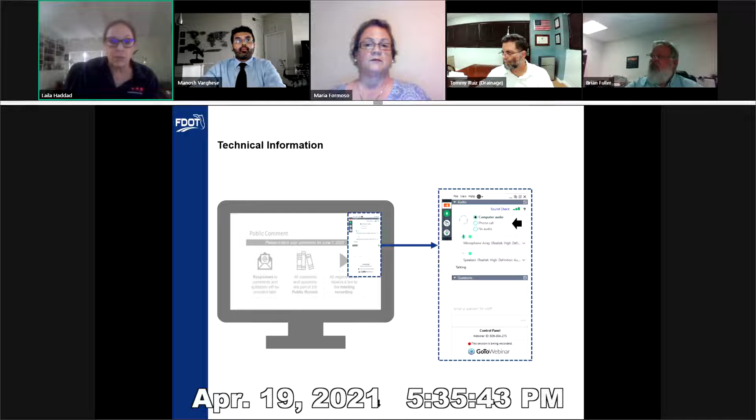Next slide, number 5. For those of you who have dialed into the meeting on the telephone line and are viewing a hard copy of the slide presentation, the presenter will announce the page numbers of the slide being shown on the screen.

Next slide, number 6. All attendees are placed in listen mode only throughout the meeting. You can submit comments or questions by typing them into the question pane on the control panel anytime during the presentation. We will provide responses after the presentation, or you can wait until the end of the Q&A session and we'll open up the microphones.

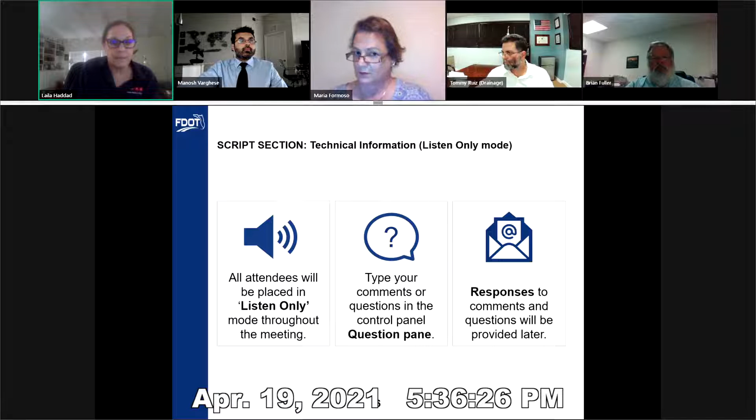Next slide, number 7. This workshop is being recorded, this meeting, and will be available after the meeting on the project website.

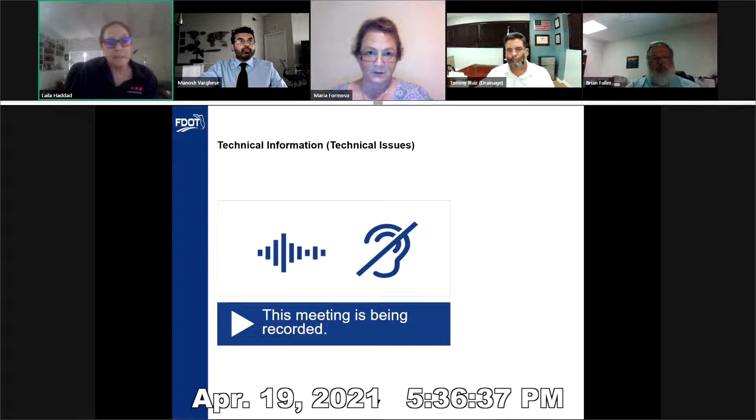Slide number 8, please. Public notice for this virtual public meeting, including information on how to access the meeting platform, was provided in flyers to property owners and tenants in the project area, a posting in the Florida Administrative Register, advertised in the Indian River TC Palm, in emails to persons on the project contact list, on social media feeds, and other notification methods. The notice was also posted on the City of Sebastian and the Indian River County MPO website.

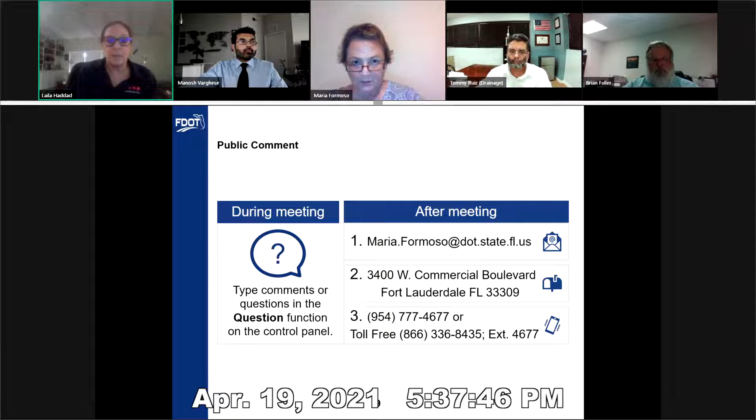Next slide, number 9, please. The department encourages the public to participate in this project by submitting comments and questions. As mentioned earlier, you can type your comments in the question function on the meeting control panel during today's meeting. You can also email the FDOT project manager or send mail to 3400 West Commercial Boulevard in Fort Lauderdale, or you can call the project manager at 954-777-4677. All comments and questions submitted through these options are part of the public record for this virtual meeting and will be considered by the department during project decision making.

Slide number 10. Non-discrimination policy and rules of engagement. Next slide, number 11, please.

The Florida Department of Transportation is required to comply with various non-discrimination laws and regulations, including Title VI of the Civil Rights Act of 1964. Public participation is solicited without regard to race, color, national origin, age, sex, religion, disability, or family status. Persons wishing to express concern about Title VI may do so by contacting either the Department of Transportation District 4 coordinator or the Title VI coordinator in Tallahassee.

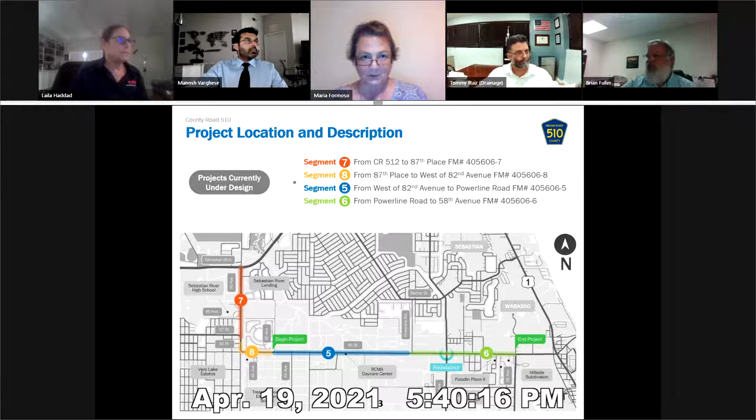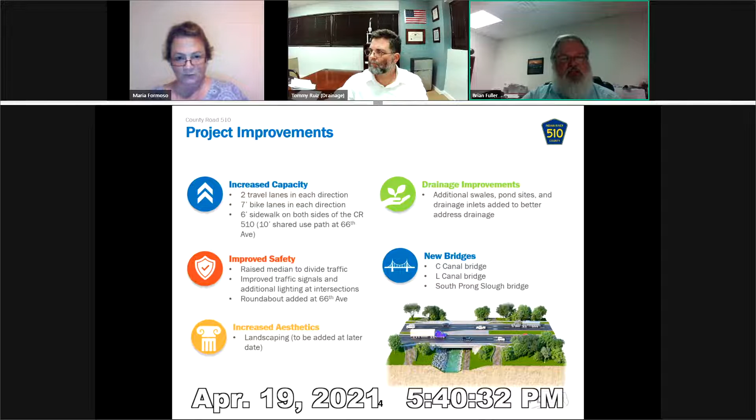Slide 14, project improvements. This project includes increased capacity, adding 2 travel lanes in each direction, and providing 7-foot bike lanes in each direction. We're also providing 6-foot sidewalks on both sides of County Road 510, with a 10-foot shared path at 66th Avenue. Improved safety includes raised medians to divide traffic, improving traffic signals, additional lighting at intersections, and a proposed roundabout at the 66th Avenue intersection. Increased aesthetics, with landscaping added at a later time. Drainage improvements include additional swales, pond sites, and drainage inlets to better address drainage requirements. 3 new bridges are included: one at C Canal, one at L Canal, and one at South Prong Slough.

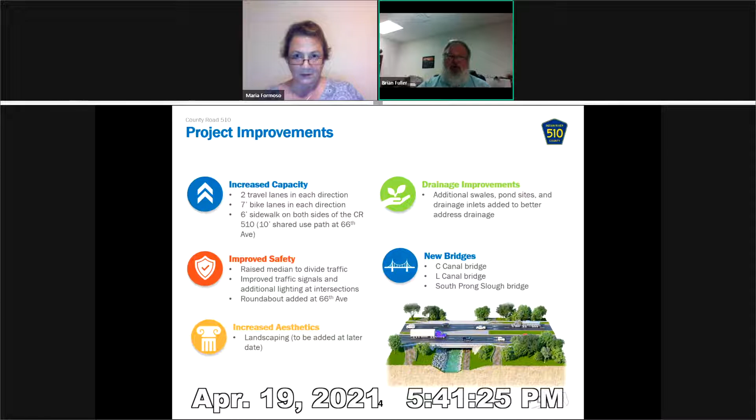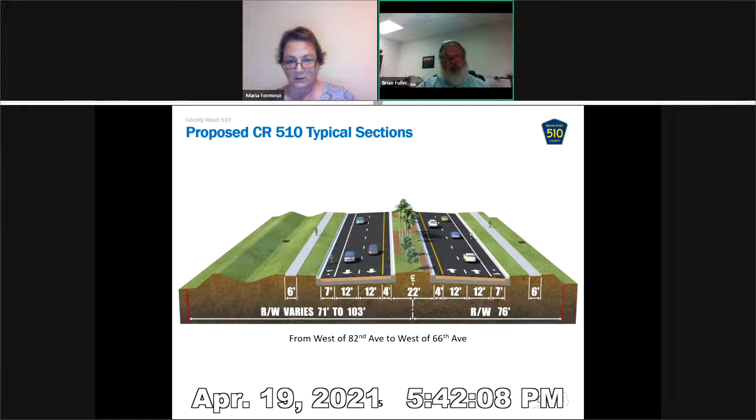Slide 16. This is the proposed typical from east of 66th to 58th Avenue. It includes 2 11-foot lanes, a 7-foot buffered bike lane, a 6-foot sidewalk on both sides of the roadway, and a 22-foot raised median. Roadway drainage is collected in curb inlets within the curb and gutter section and piped to the proposed pond site.

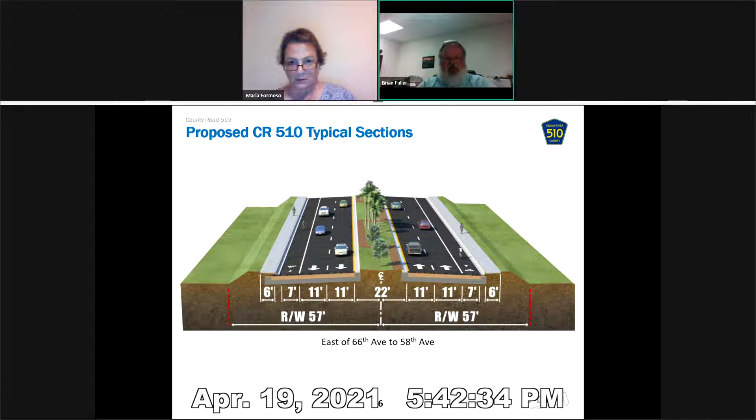Slide 17. As part of this project, right-of-way acquisition will occur on both the north and south of the existing County Road 510 to accommodate the widening of the roadway. Drainage easements will be acquired for proposed water retention areas and off-site ditches. Temporary construction easements and license agreements will be acquired to accommodate construction activities outside of the proposed right-of-way.

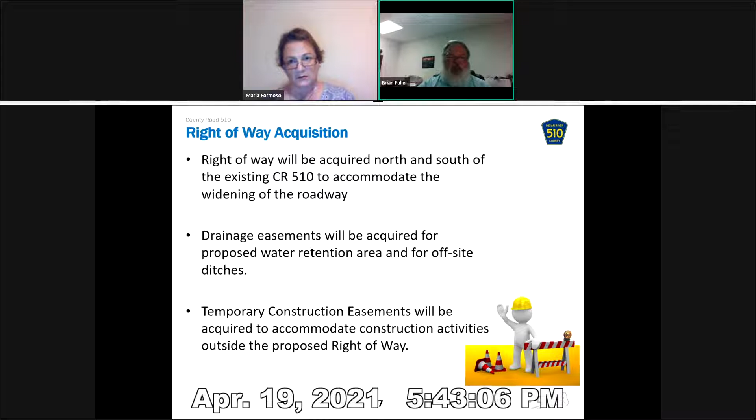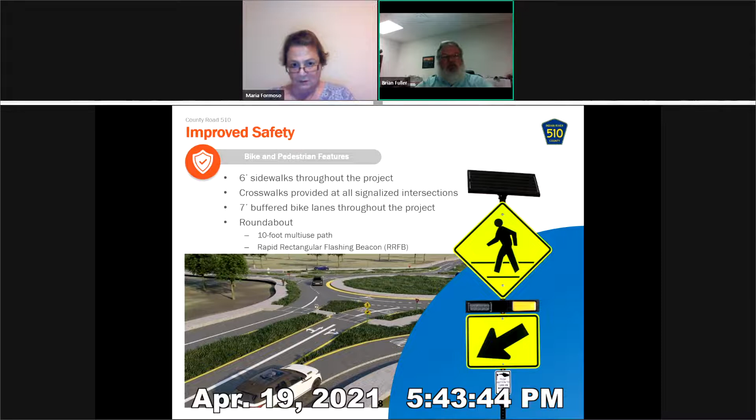Slide 18, proposed improved safety for bike and pedestrian features. We're providing a 6-foot sidewalk on both sides of the road throughout the project limits. Crosswalks will be provided at all signalized intersections, and a 7-foot buffered bike lane will be provided on both sides of the roadway throughout the project. Additionally, at the roundabout proposed at 66th Avenue, we're proposing a 10-foot multi-use path and the use of rapid rectangular flashing beacons for the crosswalk.

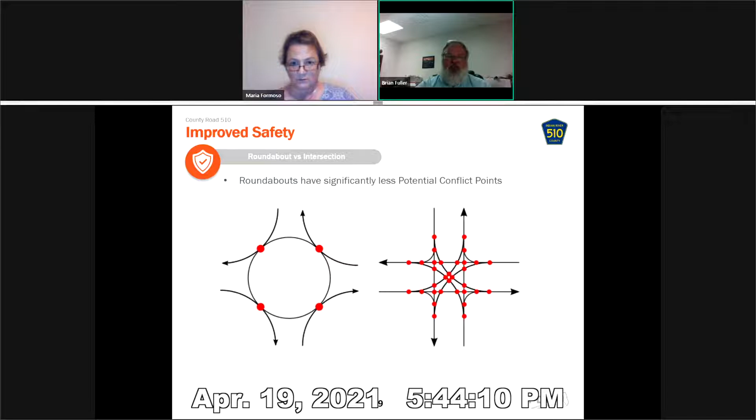Slide 19, improved safety. This is a comparison of the potential conflict points for the proposed roundabout at 66th Avenue. As you can see on the left, there are only 4 conflict points with the proposed roundabout, but with a standard signalized intersection, you have a total of 32 conflict points.

Slide 20, aesthetics. Any landscaping proposed for the project will be added once the roadway construction is complete. With the proposed roundabout, we provide a gateway opportunity, and there is also potential for a monument display.

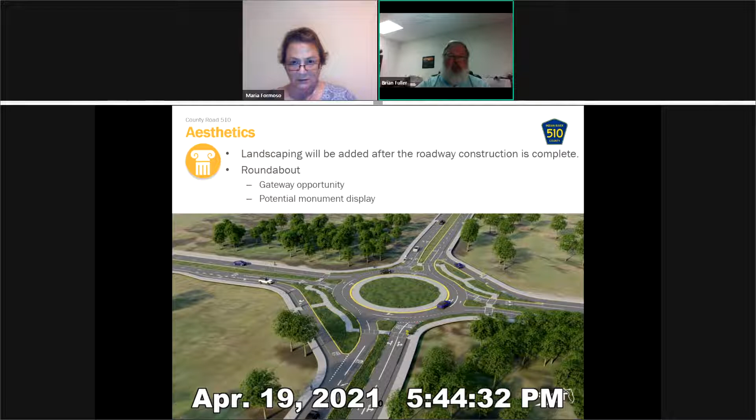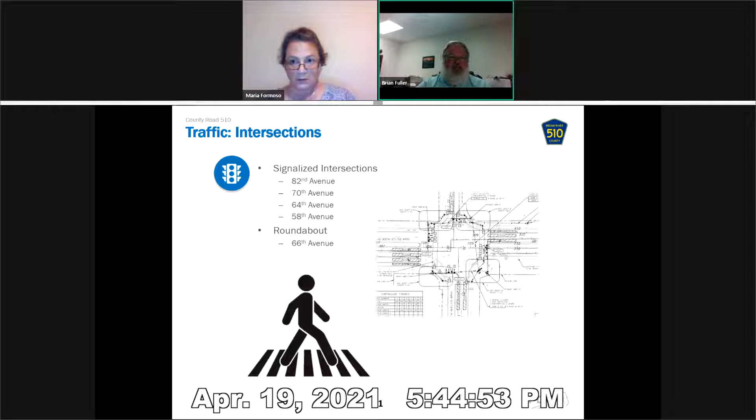Slide 21, traffic intersections. We are proposing signalized intersections at 82nd Avenue, 70th Avenue, 64th Avenue, and 58th Avenue. Additionally, we are proposing a roundabout at the 66th Avenue intersection.

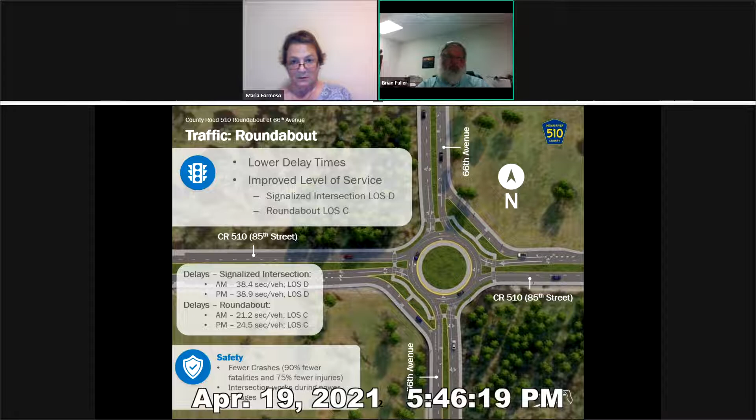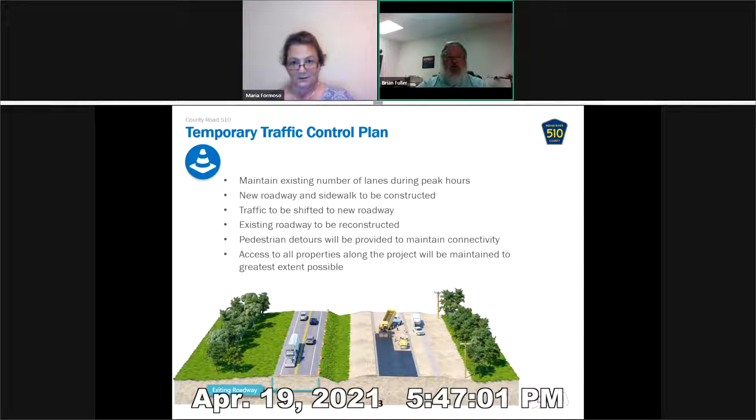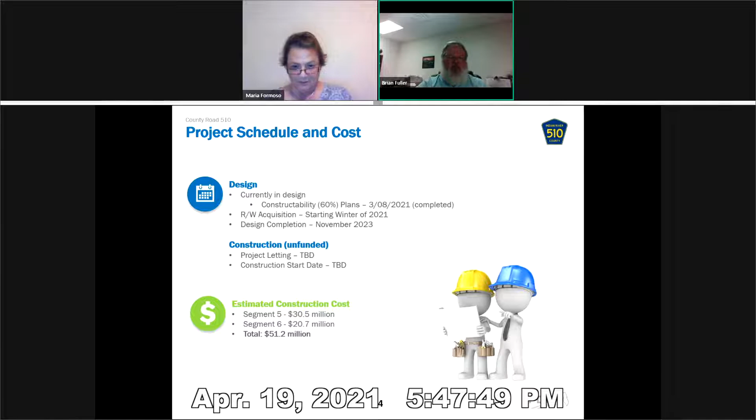The current cost estimate for segment 5 is $30.5 million, and for segment 6 is $20.7 million, for a total cost of $51.2 million.

And now we'll have a question and answers. Layla? Oh, I'm sorry. Maria, Layla, are you muted? Sorry, I was muted. I know how that goes.

Brian? Yes, as part of this design, the project was simulated with two trucks going through the intersection at the same time. Manosh, would you go ahead and provide that so they can see it? It may be a little bit hard to visualize, but it shows the trail of two semi-trucks going through the roundabout at the same time. Yes, give me one second, let me just share.

There's another question. What is the closest comparable roundabout to this one? There's a couple of roundabouts. There's a new one that was just completed.

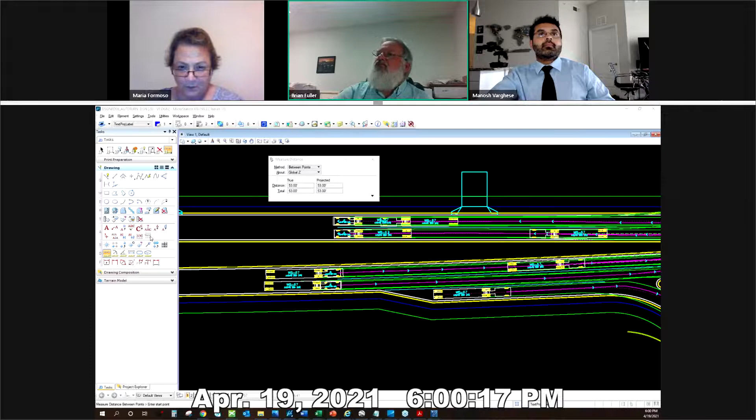In Brevard County, at Lake Andrew and Pineda, it is a 2-lane roundabout. It's just been opened. But I'll go ahead and finish this one, then we'll go back to the other one, Manosh. Additionally, in Palm Beach County, there's several 2-lane roundabouts, along Donald Ross Road, and also on Central Boulevard, which has multiple roundabouts. Now, some of these have a bigger circle just because of the geometry, but they are still 2-lane roundabouts.

And also at PGA at Marisol.

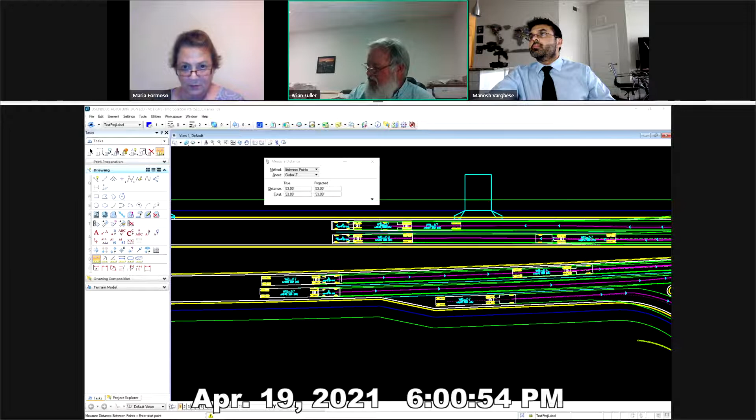Now, going back, as you can see, this is two semi-trucks approaching the roundabout. Scroll to your right, and let's see them traveling through the roundabout.

With a semi-truck, there is the concrete apron in the roundabout, which is allowed for semi-trucks to drive over. That's why it's designed that way, so they can utilize it.

Zoom out and center on the roundabout. As you can see, the two trucks are able to continue around through it. This is a requirement from DOT, that it has to accommodate commercial vehicles, and actually it's required to accommodate a commercial vehicle with a personal vehicle at the same time. This one actually goes above and beyond that by being able to accommodate two WB-67 vehicles at the same time.

What is the anticipated completion of the entire project? We currently do not have 3 out of the 4 segments funded for construction.

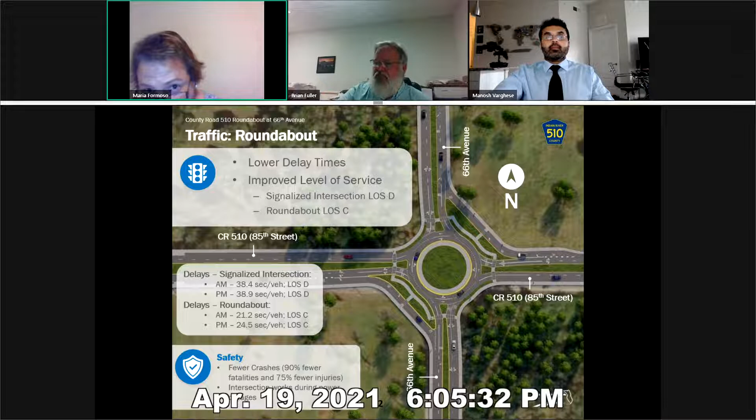Robin Brisbois, are you attending the meeting? Yes, I'm here, Maria. So Robin Brisbois is going to be overseeing the right-of-way appraisal and acquisition efforts, so I will turn it over to her to answer that question.

I think what they're saying is that the right-of-way cost estimate is based on 2015 figures. Is that what you're saying, Layla? Yes, I believe that's the question. I would have to look into that to verify if that is accurate or not. I don't know right now.

Can we get the email and the name of the person so we could follow up, please? I'm taking a note of that.

I know that we update our cost estimates yearly, so that doesn't seem correct, but I need to look into it. We can follow up on that one.

How do you handle the construction of the roundabout? Will the intersection be closed? No, the intersection will not be closed. Traffic will need to be shifted to accommodate construction of the roundabout, but we will be maintaining 2 lanes on 510 during construction.

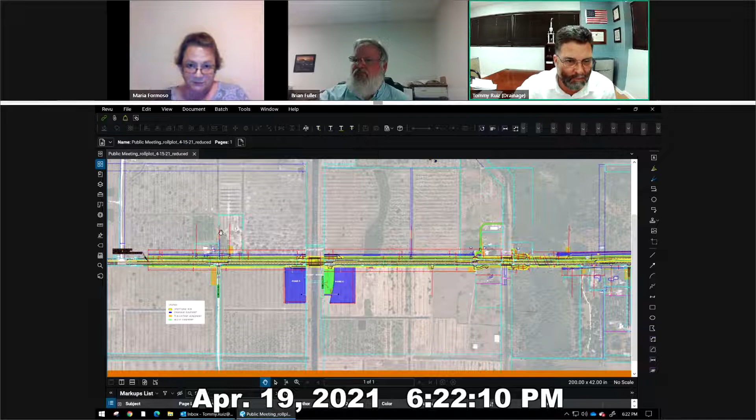Yes. Okay, I want to share my screen. I think you need to make me a presenter so I can go through. Okay, Tommy, I made you a presenter. Great, thank you. Are you able to see my screen there, showing Pond 5 at the very beginning? Yes, we are. Okay, great. I'll start all the way at the west and move my way east. Starting over here, here's 84th Avenue.

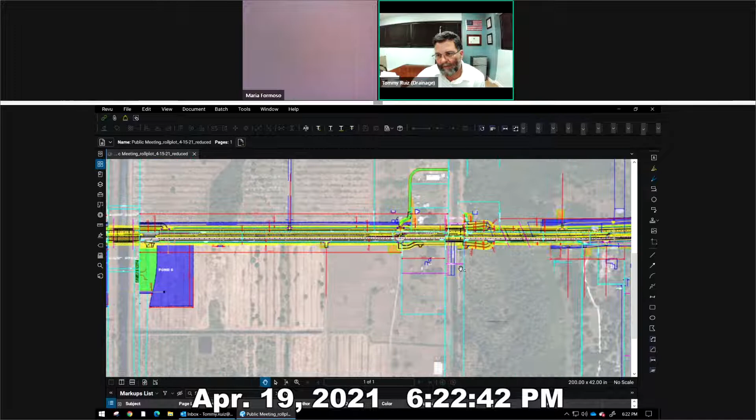As we come through, we're going to require one pond here from private property. There's going to be another pond required here, Pond 6. This is Lateral C canal. Moving east, we keep going. We're going to need a pond right here. This pond right here, Pond 7, is on property already owned by Indian River County, so no right-of-way acquisition there. Moving on.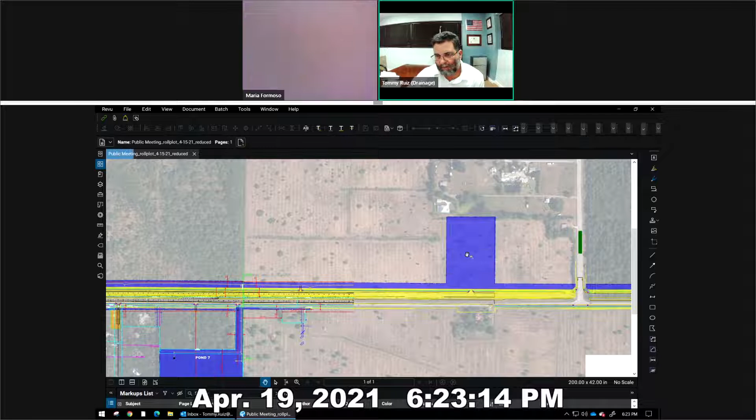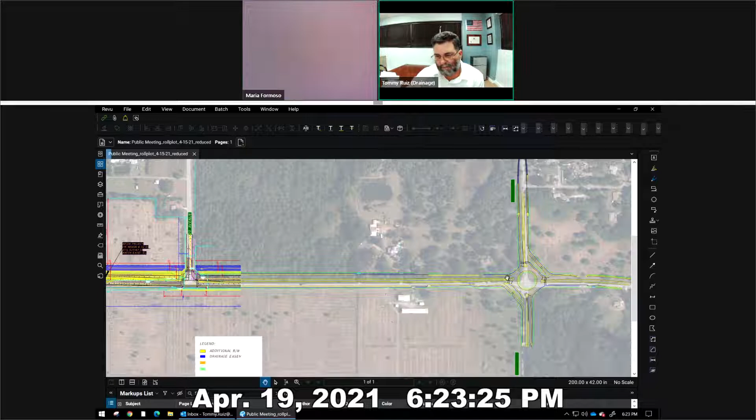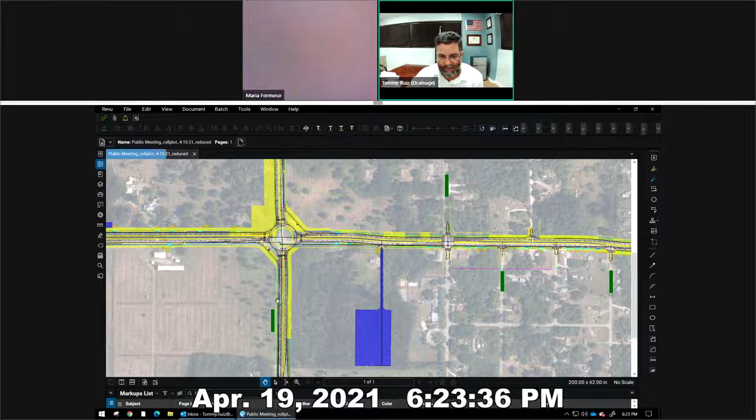We're going to need one pond right up here, Pond 8. And Pond 9, right here. This is the 66th roundabout. So Pond 9 is right here.

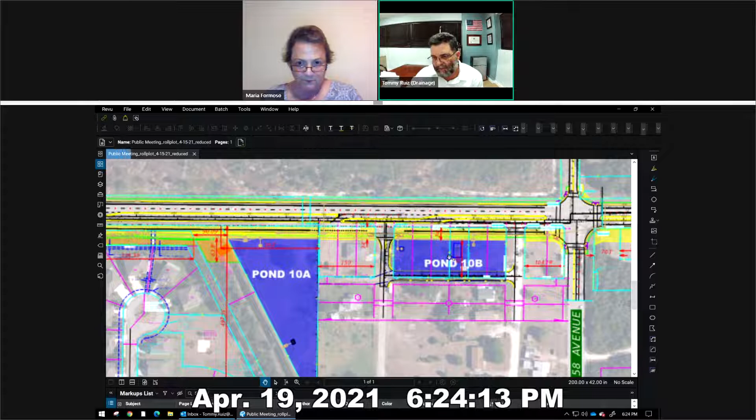And then finally, Pond 10 is actually a two-part pond. We've got Pond A and B, all here near the end of the project. Pond 10A is on property owned by Indian River County. And Pond 10B, most of this is owned already by Indian River County, except for this little parcel right here where there's a house located. So all these other parcels are already owned by Indian River County. And right now, the right-of-way acquisition being proposed is a drainage easement, and that's it for drainage.

I just got a message from Jim Mann from the Indian River County MPO. Regarding the discussion we had earlier about 66th Avenue, he states that south of 510 is going to be widened to 4 lanes, but not north of 510. That, I believe, was what we thought was an Indian River project, but evidently it's not. Okay.

Yeah, so the Indian River project is, I had north and south. The project with Indian River County is the south. I am at 7,800 across from 79th Terrace. The original plan already has the retaining wall from the front wall of my house. Should I add the additional width of the bike path, 7 feet, and walking path, 6 feet, as additional loss of land? This would put the wall a minimum of 30 feet from the front of my house, possibly even closer. Is this correct?

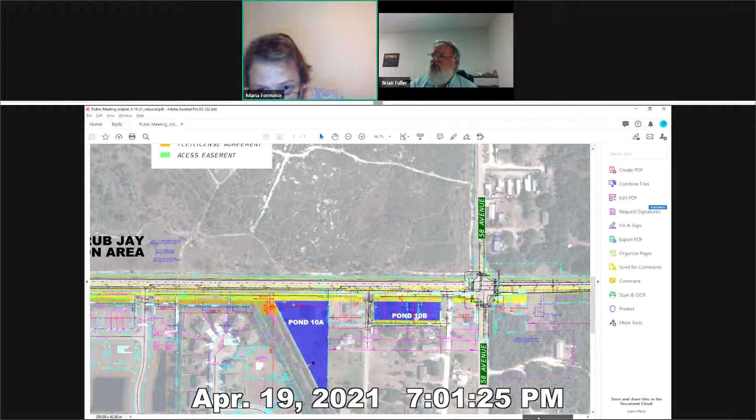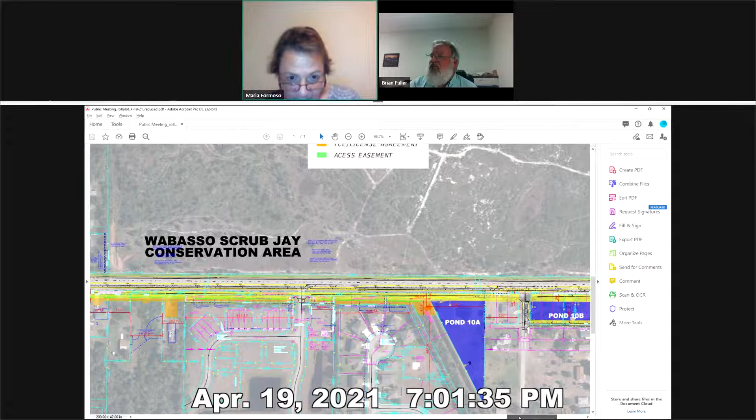I'm east of there, yes sir. We're panning through, we're zooming in, and then you tell us which direction to go. To 58th Avenue, I see that. Now we're going west. Okay, now we're going west.

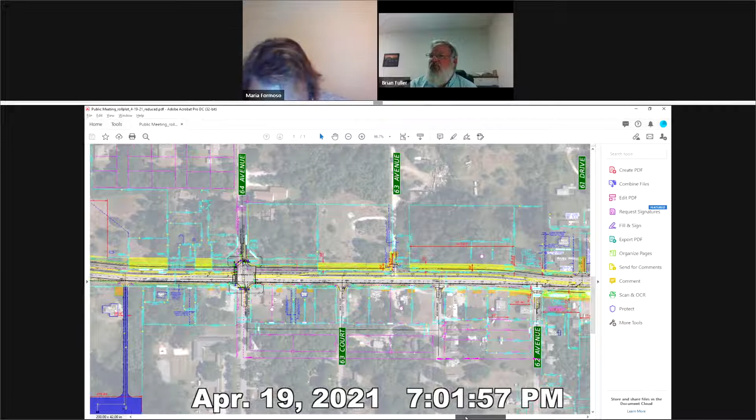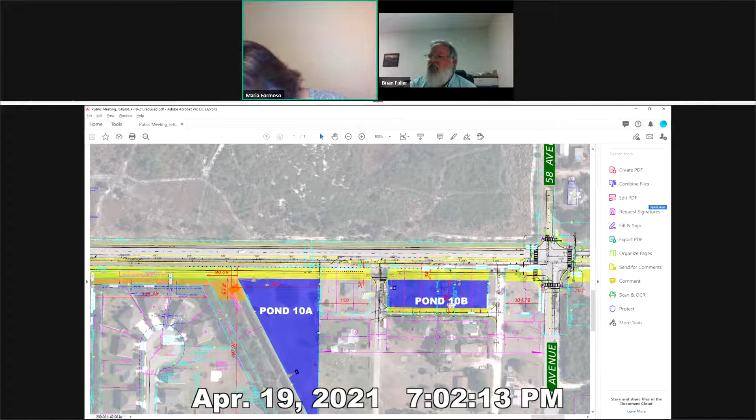58th Court, do you show that on there? No, you have to go 58th east. Court was, I didn't think you would have it on there. About 59th Avenue? Please bear with us, sir. 58th Court, keep going east, Manoj. Which one? This is 58th Court. Hold, the road right here.

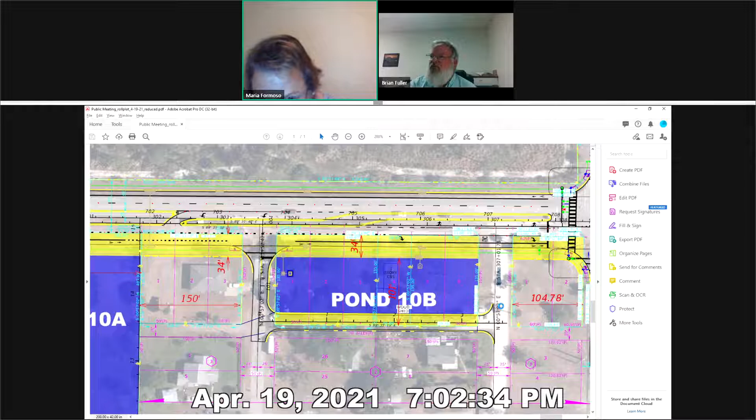This is 58th Court. Yes, so if I may, sir, actually quite a bit of thought was given to this. Currently you have access to County Road 510 from 58th Court. In the future, 58th Court? No ma'am, there's a dead end, and the reason I know that, my aunt owned the property at the end of 58th Court, and that's her private property. There is no throughway there.

Manoj, can you zoom in to the intersection of 58th Court and County Road 510, please? Yeah, sorry, give me a second. The PDF seems to be loading. One second. Let me just close it and reopen it. Give me one second.

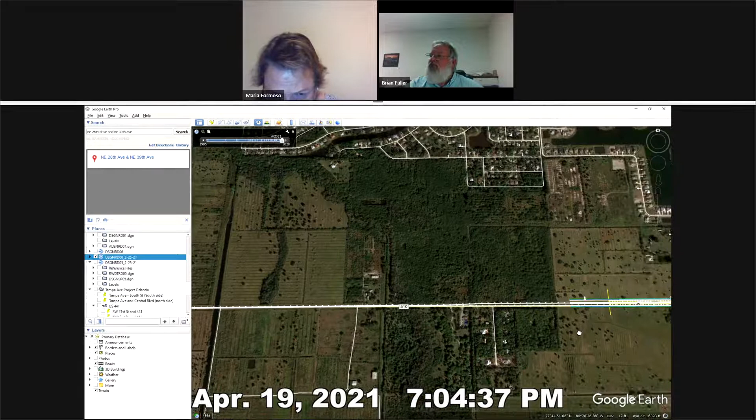You wanna find it? Sorry, this file is quite large. Let me, I think maybe the easiest way... okay, here it goes. Maybe an easier way would be to load it differently, because this is going very slow. There's a road here, part of Palatine Square. Right, yeah, I found where they were gonna build a pond right here, I think they were gonna connect the two together. Well, that would come behind two of the citizens' houses that they're buying, but there's no access road to the south of there.

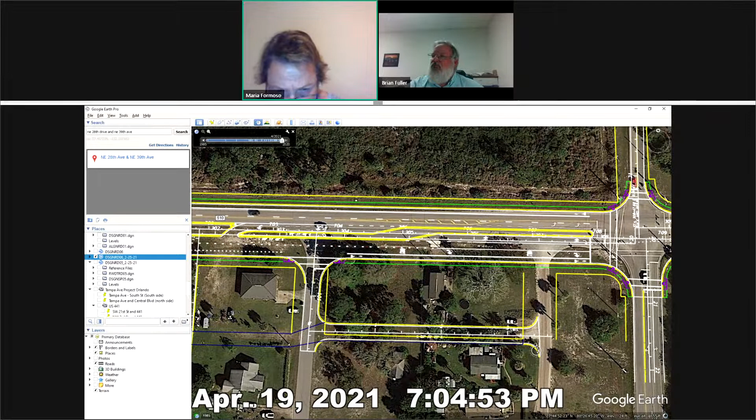Manoj, I have the roll plot up if you want me to share that. Oh, you got it there. Okay, I'm doing it with Google Earth. I think this will be... can you, Manoj, zoom in on 58th Court? Yes, that's this road. So, the gentleman that made the comment, zoom in there, okay.

If you'll bear with me, I'd like to explain something to you. Currently you have access from 58th Court directly onto County Road 510, do you not? Off 58th Court? Yes, sir. Coming north off of there, yes, but south... Yes, sir, one at a time.

So we studied the option of leaving that access point. And due to your concerns over your safety, we determined that the natural outcome would be people making a right turn out, crossing two lanes to get on the left lane, and make a U-turn to go eastbound. Would you agree with that?

I know about that, this is what you're proposing, but right now those two houses that are on that corner happen to be my cousin's, sir, and they've sold, they're selling it to the state. As of right now, there's no access to that area.

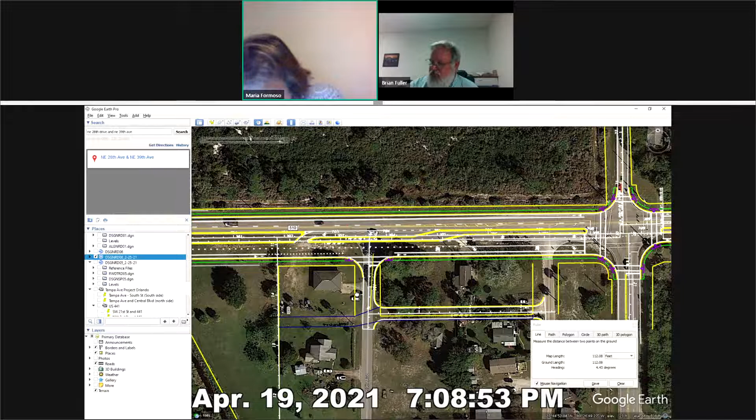So this was done by design, and it was coordinated with Jethro, and it was coordinated with Indian River County and the entire community there, and everybody was on board on this. Yeah, I was there, so I know.

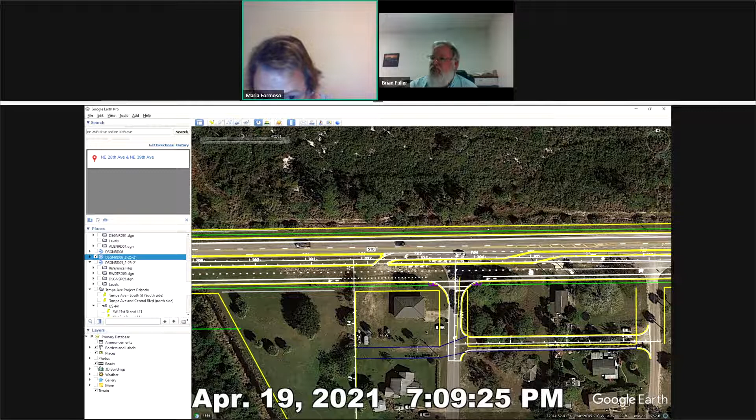But what I'm saying, it's not just there. We're talking about these other roads on the south side of this highway, like 62nd Avenue, 63rd, and 64th. Now, we can only do one at a time. So let's go to 66, and then you can voice your concerns over 66.

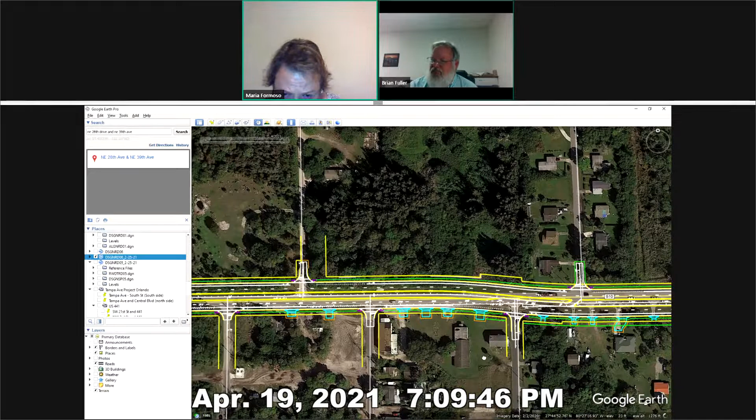So 66 would be at this roundabout. Yes, exactly. So where is your area of concern? Okay, sir, could you tell us what you object to here?

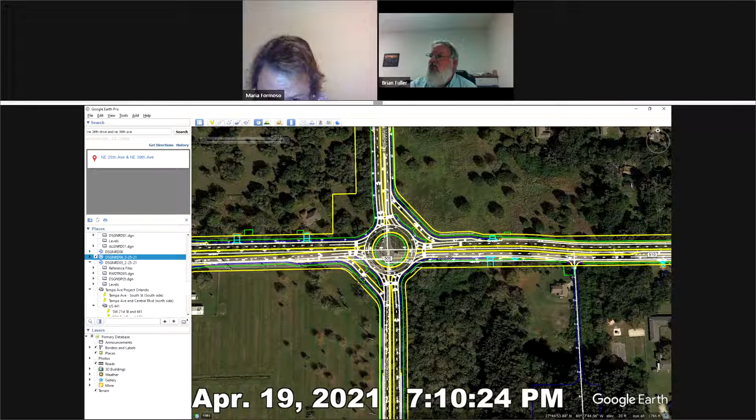Can you show me 61st Drive on your map? Go east, Manoj. East. 61st Drive is here on the top, this north part.

So what was your concern here? Sir, are you with us? I'm with you, I'm waiting on you. Okay, so Manoj says that this is the road you referred to.

That's Lowe's Park, and if you're going north, that's a dead end. The only access they have is coming to 510, and as I said earlier, from US 1 to 7th Avenue, they are locked in. We are providing access off of County Road 510, sir.

And as you can see here, you actually even have a left direct access as well, and an ability to go left going out. We're not changing access for that community, sir. That's what I'm saying. 500 people that live in that area cannot get out to 510 when this traffic is backed up, but you're not showing it on your maps or any of that.

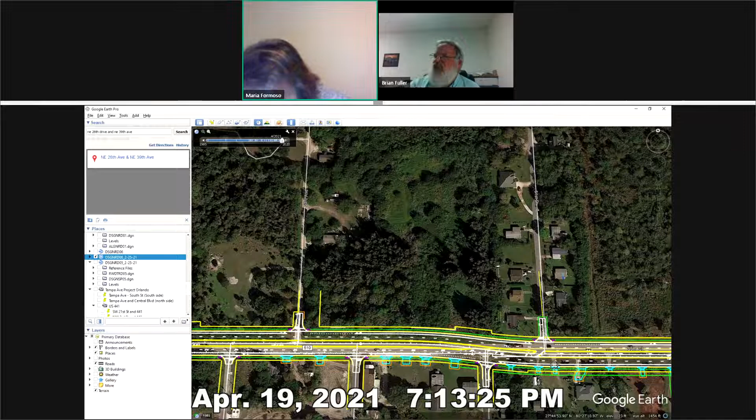And also now, at 64th Avenue, you were talking about a traffic light. At one time, we were told they would not put a traffic light. How are the kids and older folk gonna make it to that store without a traffic light being there? Okay, but we are providing a traffic light, so I'm not sure what the issue is.

Is it that before you requested and were denied a traffic light? I can't speak to that, but we are currently providing a traffic light. There's a caution light there, and we can't get out even there now. Yeah, but it's gonna be a full signal when the roadway is widened. When the road is complete, there will be a full signal there. Yes, sir, okay.

Then it looked like we need to go back to our commissioners to find out, because like I say, I'm still concerned about that egress. If there's a major hurricane and everybody has to come through that area, there's no way in the world that area's people can get out. We can't get out now, and with you widening the highway to 4 lanes, it's going to even be worse.

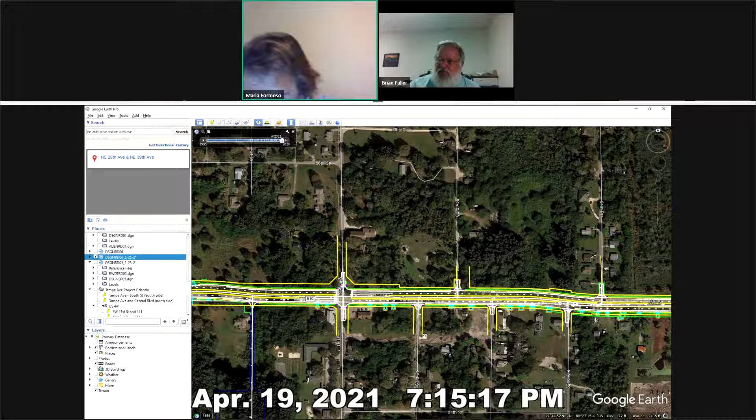I've lived all over the United States, ma'am, and I've seen what these roundabouts do, okay? And they are not in the best interest of anybody. Well, have we answered your questions as far as providing? You have. We have? Okay, thank you very much.

If you would like to meet separately, one-on-one or in a small group, like you said, Jethro knows me. I work very closely with the Wabasso community, they all know me. And if you would like for us to present to you and explain things on a smaller scale, we'd be happy to.

However, keep in mind that the scope of this project is to increase capacity for County Road 510. We're going from 2 lanes to 4 lanes. We're providing access to all the side roads, side streets, and driveway connections, and we have not severed access from anyone. However, the scope of our work does not entail improving the entire community's roads.

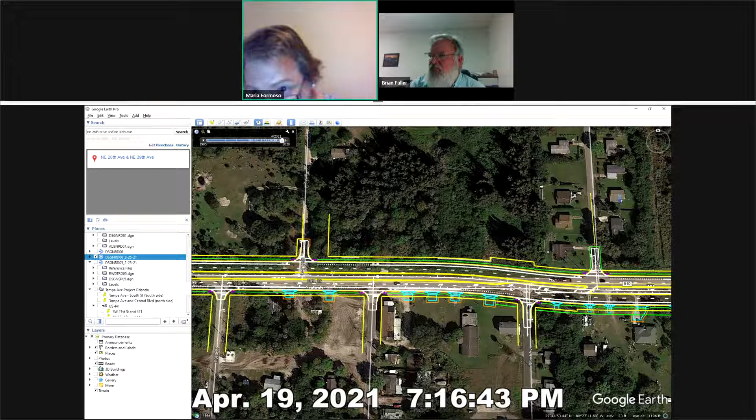First of all, they're not under our jurisdiction. Please let me finish, sir. So if you're looking to accomplish that, I recommend you take that up with Indian River County Public Works or the Indian River County Board of County Commissioners. We'll do that. Thank you so much, sir. Thank you.

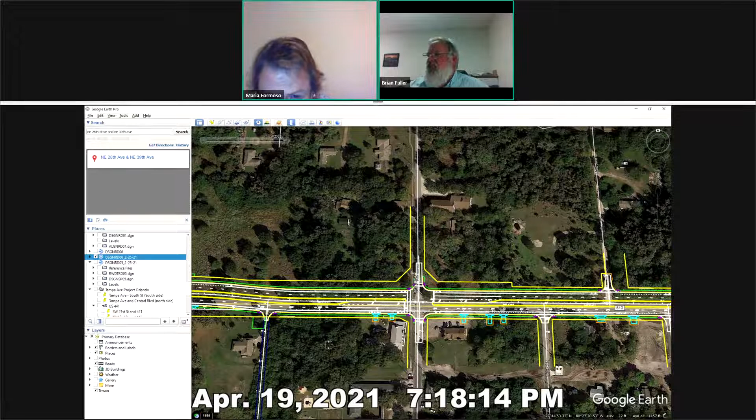Okay, so can we zoom in, and ma'am, if you would please elaborate on what the issues are? How far east will I have to travel out of my driveway to go west?

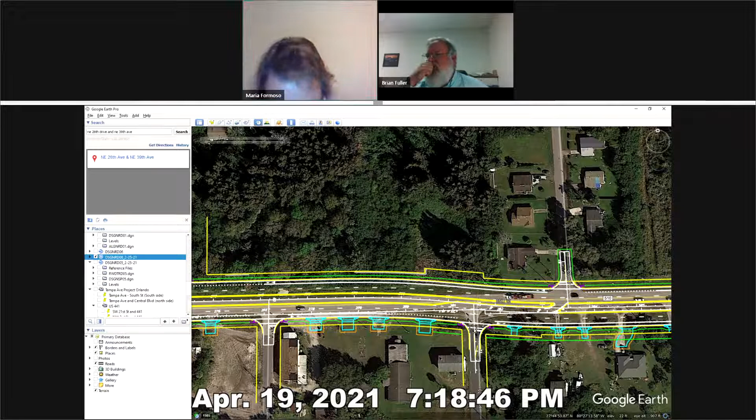First, let's try to find, are you on the south side of the road or north side of the road? Yes, I'm on the south side of the road, which means that will be the eastbound traffic. Yes ma'am, so you would actually access County Road 510 via one of the side streets, and then you'd proceed eastbound, and you'd have to go maybe 400 feet to make a U-turn and then go westbound. Is that about right, Brian? Yes.

Okay, so what the previous speaker was trying to say is that once we access 510, with the traffic being more, it's already a nightmare. It's gonna be worse once you put in the roundabout, and if there is a natural disaster, then we're gonna have a hard time getting onto 510. That's the issue we're talking about.

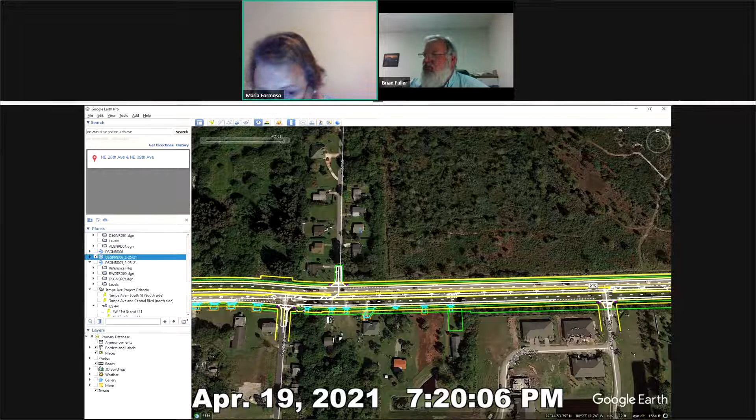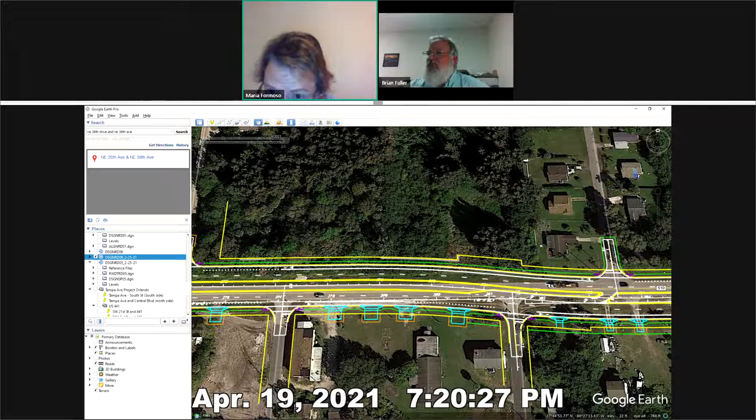Right, I understand, and I appreciate that very much. But what I'm trying to explain is that adding lanes or adding a roundabout doesn't bring in more traffic, you already have the traffic. It alleviates the traffic because it gives it somewhere to go. The traffic you're dealing with now, bumper to bumper, will now have 4 lanes to maneuver through. So it's kind of a misconception, and Brian, jump in and correct me, but I think it's a misconception that if we widen the road or add lanes, we're somehow increasing the traffic. The traffic is going to be what it is now, and the projected traffic will be what it is projected to be.

Brian, do you? Yeah, I mean, that's the reason why we're widening the road, because it needs the additional capacity. You'll still have 2 lanes, you'll actually have 2 lanes in both directions. Right now you only have 1 lane in each direction, so you should have, in theory, double the capacity of what you have currently.

And, emergency situations, you'll have, if you're at 62nd. I'm east of 62nd. So she's probably one of those blue driveway connections, those 4. Is that correct? That's correct. Okay, so say that, I'm in between Summer Lake and 62nd Avenue.

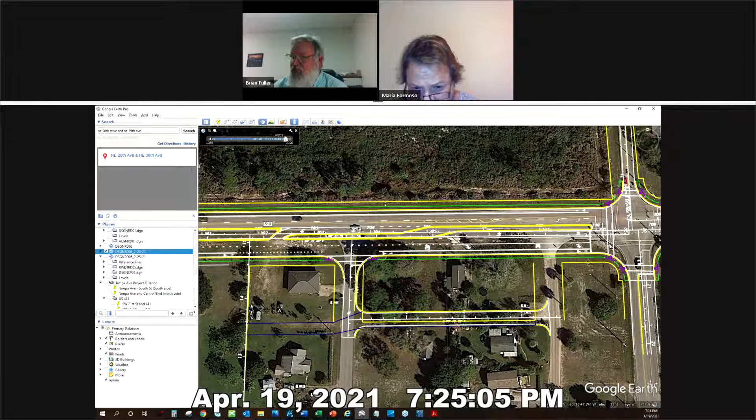No, I'm talking about - you're on 58th Court, and you're going behind Mr. Clark's house, yes, and over to 59th. Okay, would they be able to merge onto 510 off of 59th? Yes, you can - this is 59th right here. You will be able to enter 510 from here.

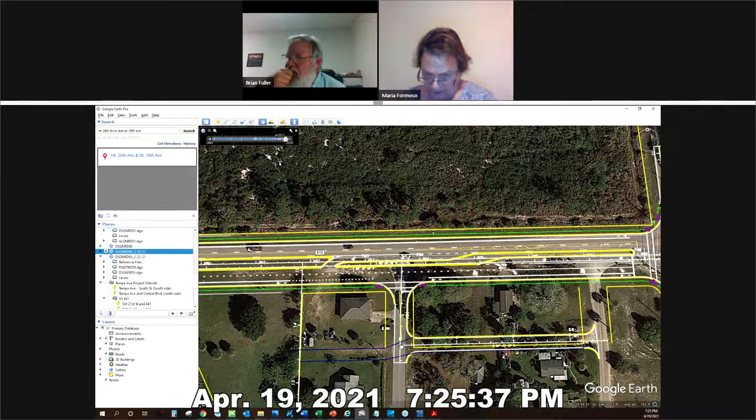Okay, now that second detention pond would look like a triangle. Go back to that retention pond. So what I'm trying to say is, would there not be an alleyway between the Williams and the Rigby's? I see you got a blue line there. There will be - oh, the blue line is a drainage easement. That's not going to be a road.

But the yellow lines you're seeing will be a road connecting 58th Court to 59th Avenue. Okay, so there won't be a road between those two houses. This area here will not be a road, but the area between 59th Avenue and 58th Court will be a road. And thank y'all for putting a traffic light at 64th. Okay, thank you. No problem. Thank you.

That was everybody at City Hall? Or, no, oh, one more, sorry. Got one more.

My name is Doris. The question I have - I had a property on 510 on the top of the hill. I sold the property to the county less than, I think, 7 years ago. At that time when I sold the property, they gave me whatever they wanted for it. I asked them how much they wanted on my property, and they told me they were going to want 40 feet of my property. That's what I thought, but after I sold them the property, I thought they were going to take 40 feet because my property was 150 by 75, and then they took everything, which is what they were paying me for.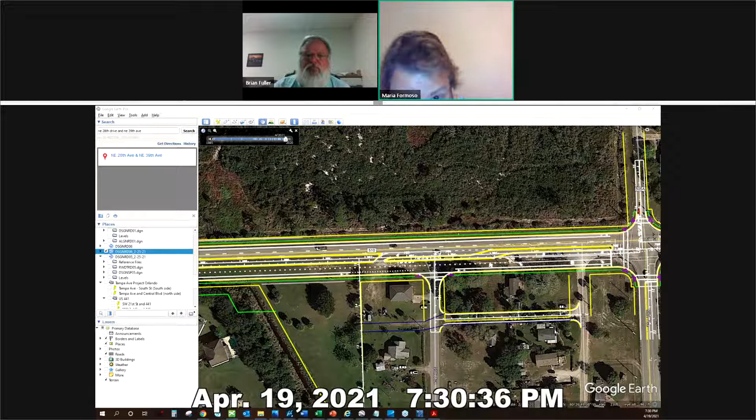I'm not qualified to discuss the price. I'm gonna turn it over to Robin Briswa, and she can perhaps elaborate on how the department deals or would like to deal with situations like yours. You're not the only one. There have been numerous property owners approached by Indian River County before the project became federalized, before the DOT took over the project, and they did not follow the Right-of-Way Uniform Act. This is something we're aware of and looking into. I'll turn it over to Robin so she can correct me if I said anything wrong.

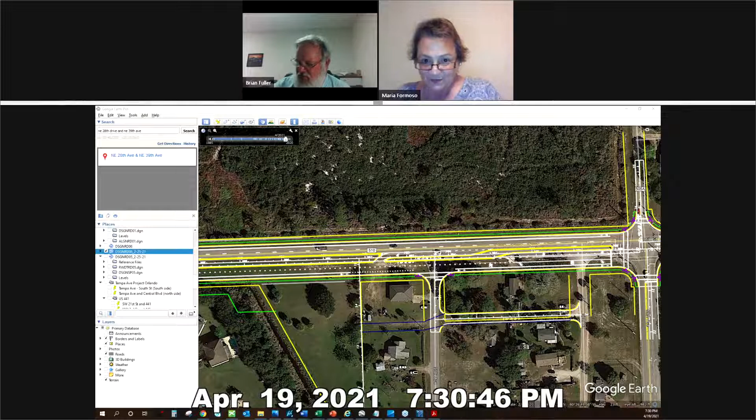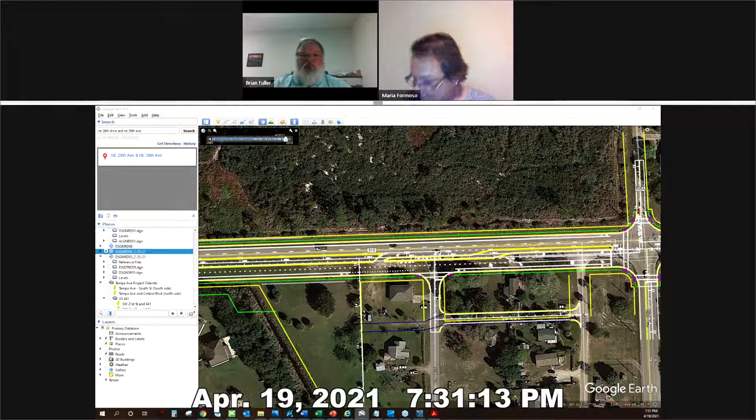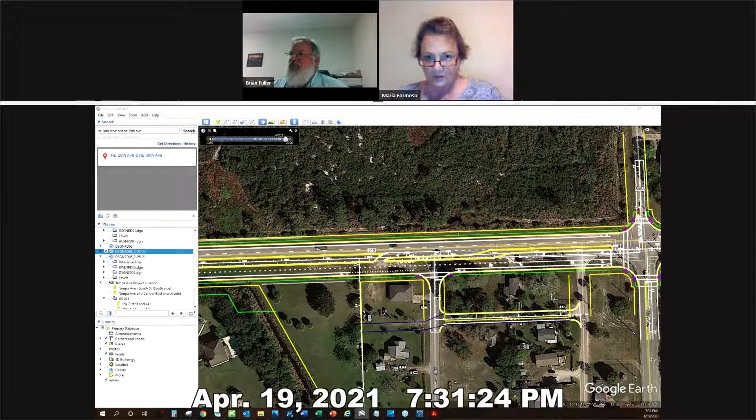No, you didn't say anything wrong, Maria. I do want to make sure we're very clear that the county was not required to follow the Uniform Act when they did their acquisition. Correct. And now that the project will have federal funding - federalized, as Maria said - that means we're going to follow a set of criteria a little different from what the county did. So again, there was nothing wrong with the way they acquired your property at the time, but now that we have federal money, we're going to be looking at those acquisitions done by the county and making sure everything adheres to the Uniform Act, which is a federal regulation.

So I'm going to want to be talking to you, and I want your name and contact information - are you still living in the area? Yes ma'am. Okay, Layla, what's the best way for him to provide that information? Can he type it in? My name is Mr. Dries. Or simply send an email to Maria with that information and she can forward it to me.

We're gonna work with the gentleman to get it into the chat for you. And if there's anybody else in this situation, we're gonna be contacting the people who worked with the county before to get some information from them and understand how everything went, and make sure it adheres to the Uniform Act we'll be following. So if there's anybody else in that group, I'd like to have that information from you as well. Mark, that's an excellent idea - just put it into the question pane and send name, address, email, or phone number, whatever they choose, so we can contact them.

We'll be getting in touch with them as this project moves into the right-of-way phase. Currently we're in design, but we'll be coming into the right-of-way phase later this year for this segment. Thank you for letting us know. Do you need them to contact you? Yes please. Did that answer your question, sir? We're gonna enter in addresses.

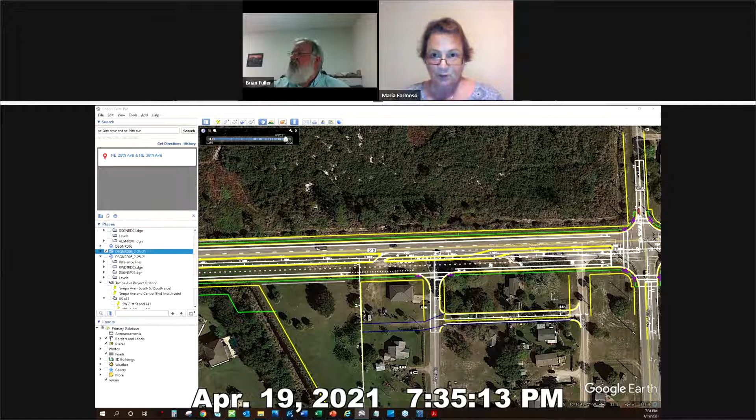Okay, and I don't see any other hands raised, so I'm sure we'll find tomorrow, on this huge matrix, some questions that might not have been thoroughly answered, and we will follow up accordingly because we do have contact information for those available. As always, we appreciate your participation. Please reach out to the FDOT project manager, Maria, at any time to have any concerns or comments answered. Thank you all for your input.